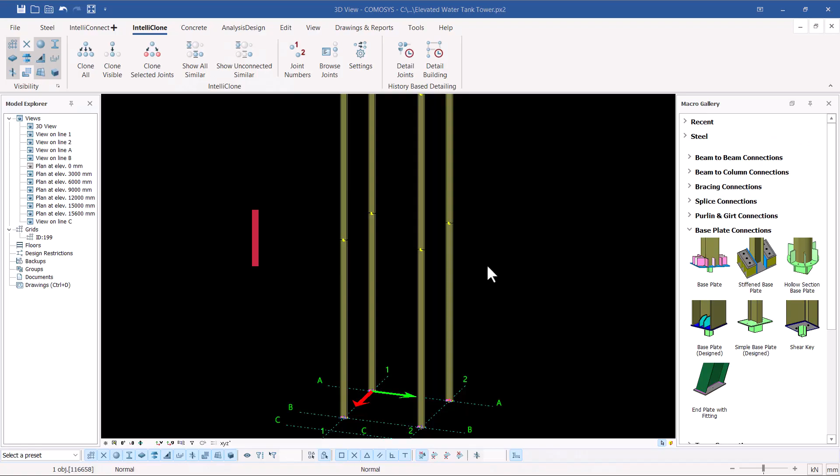Hello, welcome back. The next step is to create the splices connecting this column and this column. Let's check the height - we double click to get all the detail. That is 8 meters. If we double click on the top column, that is 7 meters.

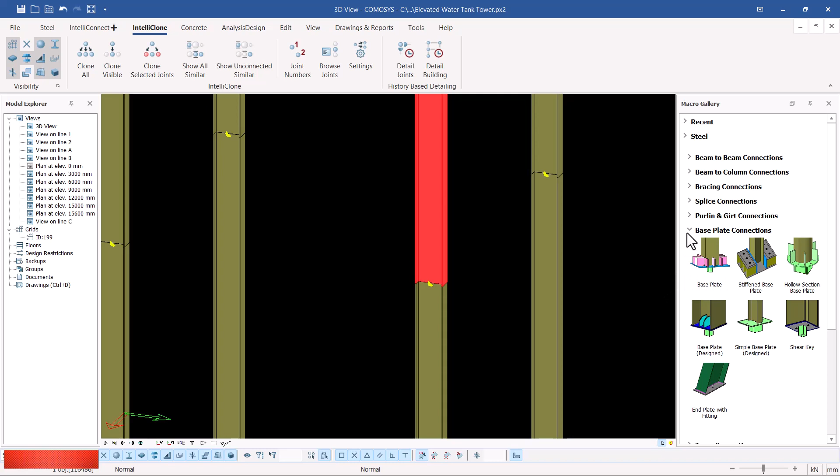First, let's create a splice here. There are two options: you can create the splice manually, or you can create the splice using the macro. Maybe the macro isn't the appropriate preference setting, but in this case, if I click on this and pick up the splice to connect this and that, you can see the splices - this is the right connection, but not exactly what we wanted.

So if I just press Control, pick any point of interest, and left and right click and hold my mouse, I'll be able to rotate these like that.

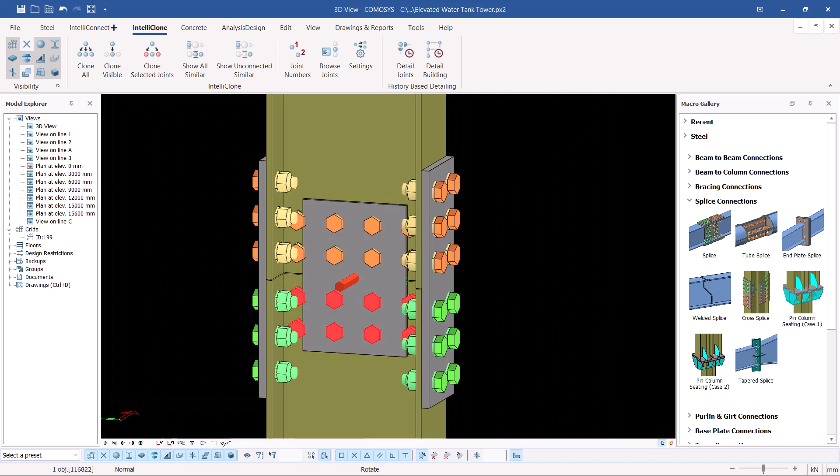So what I'm going to do next is very simple. I'm going to delete this and create my own splice, because I want one side welded on the top beam and the other side bolted, with the same happening in the opposite direction. Let me undo that splice connection and start creating my own.

So I just need some simple guidelines here using points. I'll come to Edit, then Points, and pick on Point. Then I'm going to snap here.

If I snap there, I'm not able to see the point that I've created - the reason is my points aren't visible. So I'll select that option to make my points visible. If I come back here, you can see I have my points now visible.

If I select this, right click and maybe copy that to the far end, or we have options where you can project that point to that location. So let me press Control and select the other point, right click, and come to Special Copy here.

I want to take it down by 200 millimeters. So I'll make any axis 0 except the axis I intend to offset these points downward. In this case, I'll use the z-axis. The z-axis will be 200, but prefixed by a negative sign, so it's -200.

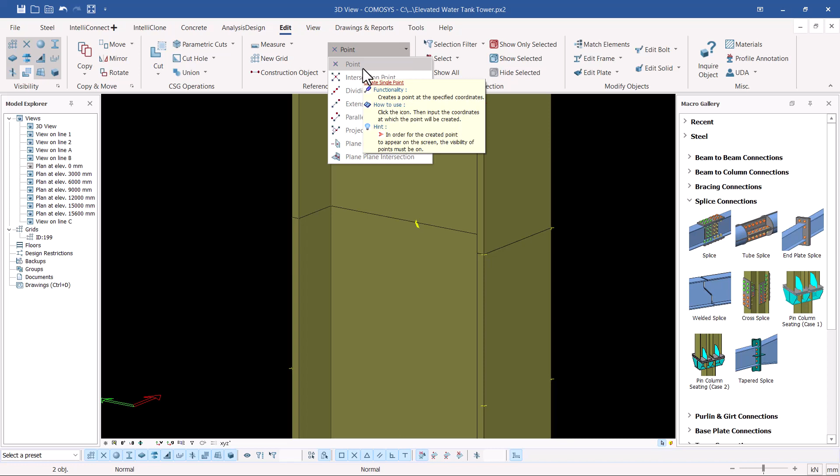So another one - because I want to create just the points for the plates in one go, I'll go ahead here and come to this flange, pick on the point here, snap right at the center right there, and pick on the same point right there. Make sure your point turns red - that means the selection is active.

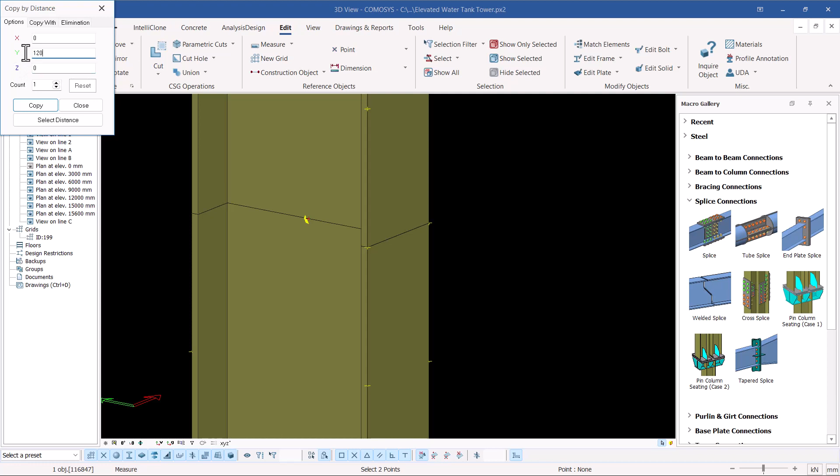So if I come to Copy here, maybe Linear right there - let me use Linear. Which direction do I intend to copy this? It will be on the y-axis. So in this case, everything except the y-axis will have a dimension of 0. On the y-axis, I intend to give it an offset of 120 millimeters.

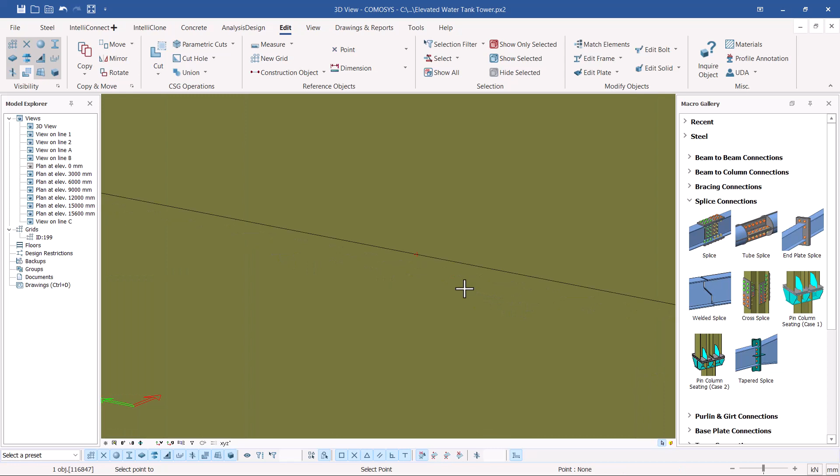So that's it. If I close that, right click and come to Interrupt here, and pick on that point right there. Select this point, right click and come to Copy, and I'll pick this point from that location and place it on top of this, because I need 240 length or width for this particular plate.

So I'll select the 2 points once again. If I right click and turn that around, I'll be able to see the 2 points easily. So if I press that, right click and come to Special Copy, then Linear.

On the z-axis, I want to copy that by 200 downward, but I have to prefix this dimension by a negative sign. So what I'm going to do is feed in -200 and click OK.

So if you take a look at the bottom end here, you can see you have 2 points, and the 2 points have been transferred downward. So I'll come back again, and since these are still active, the same points here, I'll change this to 400 and take it up by 400, but on the positive direction of the z-axis. So the splice will be quite big.

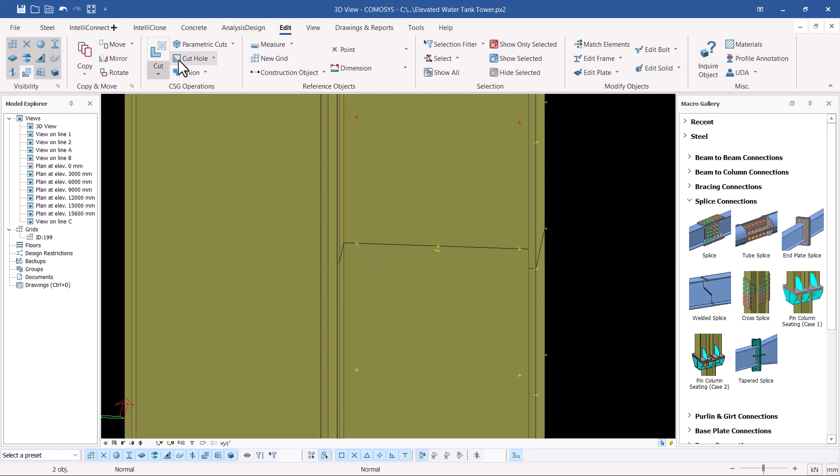So what I'm going to do is just to create a midpoint between these 2 points. How do I do that? I'll come to point and pick dividing points right there. So I'll snap on that point, then snap on that spot, then maybe project this point to that point. I'll come to points there and pick on project point.

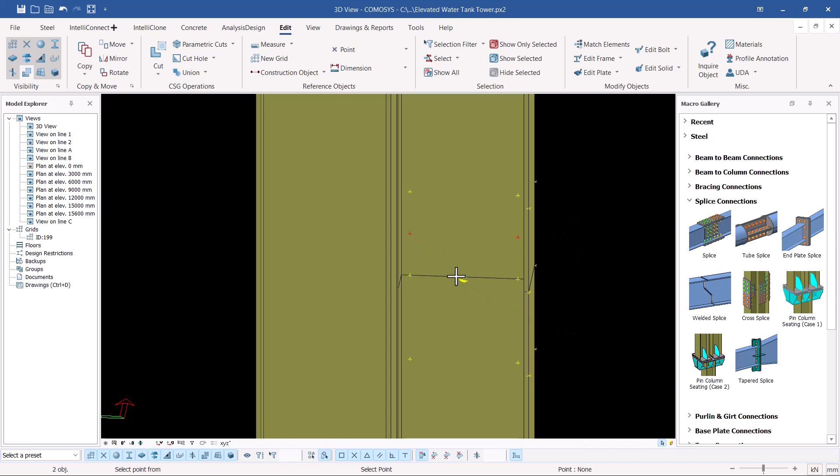So between these 2 points here, I want to project this point here. If I click on that, I'll be able to get the opposite point right there. I'll do the same thing here, select on that, right click and come to copy. So I'll copy this point and place it somewhere here. So we have the 2 points right in place. Instead of using this, we'll be using the midpoints.

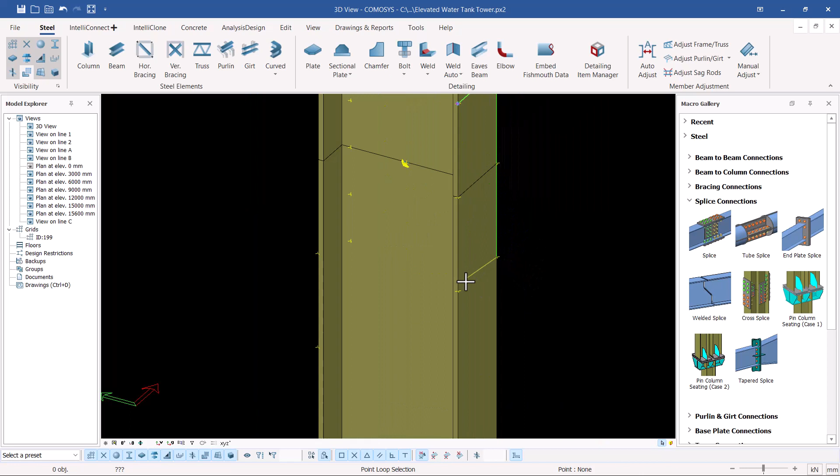Let me just turn this, we go ahead and start creating the plate. I'll come to plate, and I want to create a contour plate here by tracing our points like that. Click on that, and click on that. We have a point in place. So if we double click on that and take that front, this will be 10 millimeter thick, and you can bring it up frontward and click OK, and that's it. We have our plate in place.

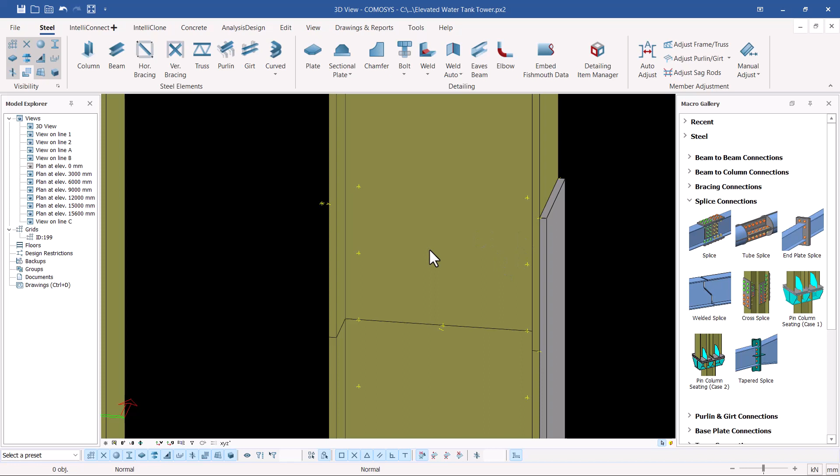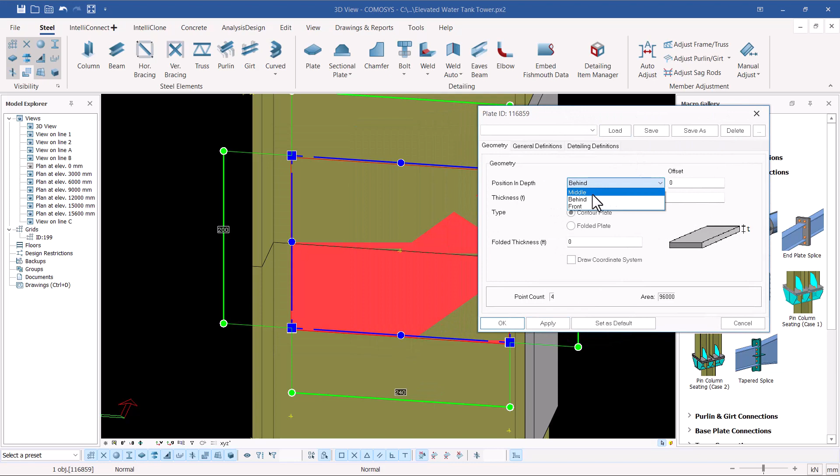So what I'm going to do next is simply creating a splice at this end here. I'll come to plate, then trace my points like that, snap on that spot, snap on that spot, and snap on that spot. This will be 10 millimeter. Yes, that will be 10 millimeter, but we'll bring it forward, and I'll give it front and give apply and give it an OK. So if I do that, I'll be able now to mirror that on the other end.

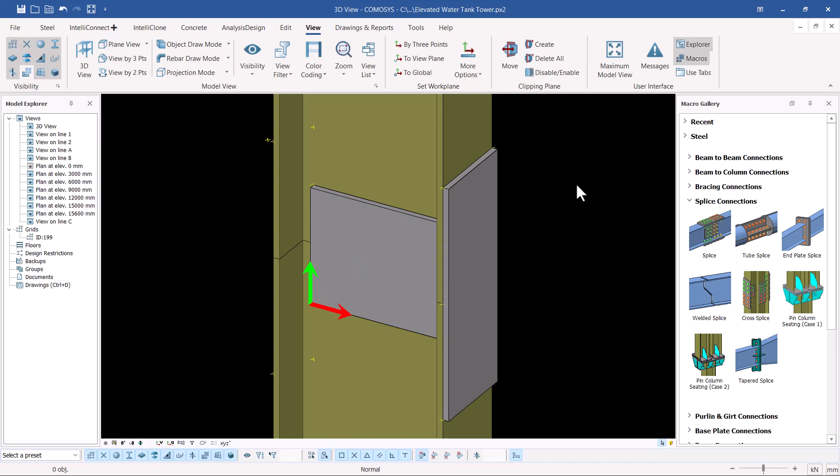So prior to that, I want also to mirror this far end. So the next thing I'm going to do is change and reorient my XYZ plane. What do I do? I'll come to view, and under view, I'm going to click on more options and pick on surface here. So if I pick on surface here, let me see whether I'll be able to turn that or mirror that on the other end. Like that, right click and come to mirror.

So if I mirror this from the midpoint right there, let me just snap on that spot. And if I mirror that, I'll be able to have my plate on the other end. So I have to change the XYZ plane by coming back once again and placing it somewhere here. So once I've placed it there, I'll be able to select on that, right click and come to special copy.

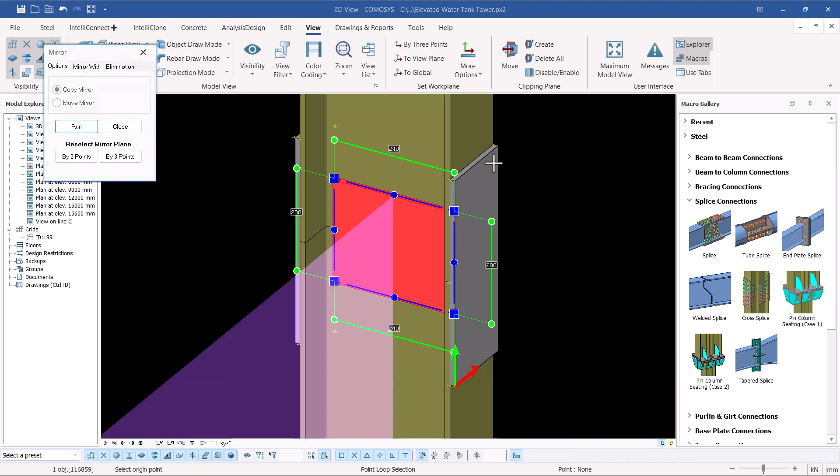Right there and pick mirror. So I want to place my mirror line from this location and snap on the bottom end there and click run. So if I go back to the other end, if I turn that other end, I'll be able to have my plate in place. So these are my plates in place.